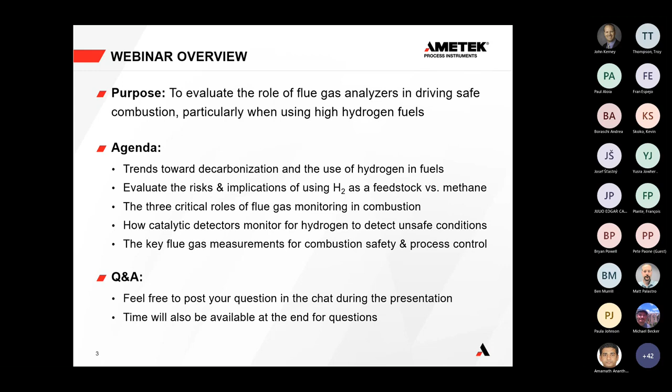So to start off, let's talk about decarbonization. So there's an inherent move towards decarbonizing combustion processes in industry in general. Governments have signed a lot of net zero carbon emission policies. There's a big focus on climate control and reducing greenhouse emissions, and that is particularly the case around carbon dioxide.

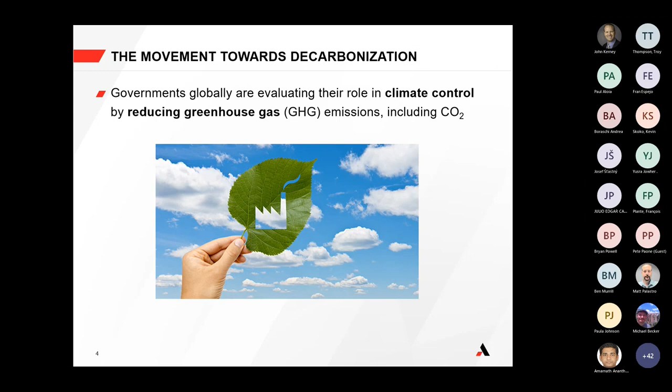And a lot of industries in the midst of it still require combustion. I mean, combustion generates carbon dioxide, but a lot of industries still depend on that. And that includes hard to decarbonize industries such as steel, cement, and chemicals, but also things like mobility in vehicles and ships and transportation. So there is still a heavy dependence on combustion and combustion-related processes.

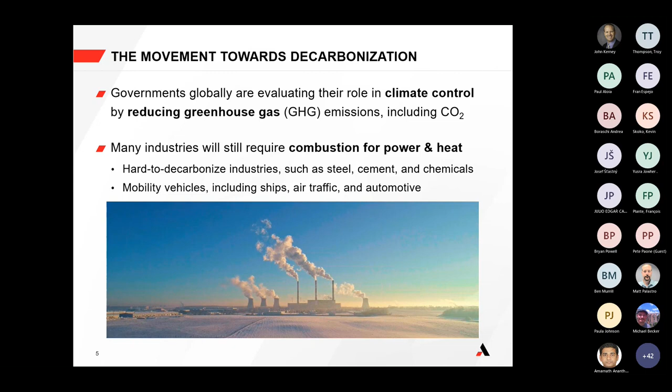When we think about large-scale decarbonization around combustion specifically, there's three methods that come up pretty commonly. There's the carbon capture method. There's different carbon capture methods, but carbon capture to remove carbon emissions from the combustion process itself. There's also electrification to generate heat in place of combustion, so using electricity so that you don't have to rely

on the combustion process. And there's also the use of hydrogen, which does not have any carbon atoms. So using hydrogen as a fuel to generate heat without carbon emissions. So that's another option as well. And so when you look at it, combustion remains important for our future, but it's also moving towards decarbonization. So we have to think about how are we going to decarbonize our processes.

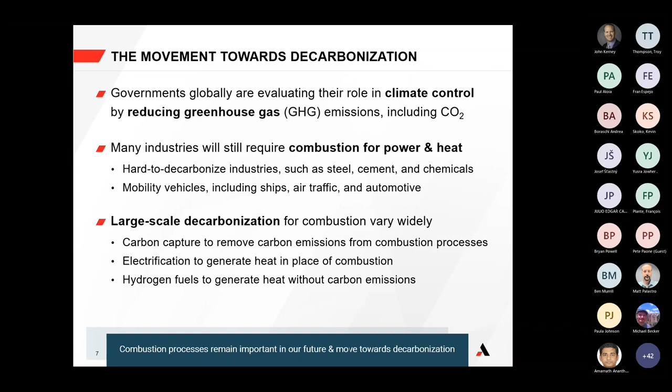So let's talk about those three methods: carbon capture, electrification, and hydrogen. So when we think about carbon capture, whether that be pre-combustion, post-combustion, or oxy-fuel carbon capture, however you choose to remove carbon dioxide from the combustion process, it's pretty well suited for certain applications. Carbon capture is much more economical, especially on the grand scale when you have a singular process or a singular pipe flow that holds a large amount of the carbon dioxide.

So things like blue hydrogen production, autothermal reforming, partial oxidation, or steam methane reforming, different processes that generate syngas, can use carbon capture very well because much of the process stream is consolidated, and that centralized singular source can be sent to the downstream carbon capture system for treatment and removal of the CO2.

So it's pretty well suited for large scale systems and centralized emission sources, but it becomes more of a challenge, especially when you look at flue gas carbon capture, where some plants have many different combustion point sources, where it would take a lot to revert all those stacks to a common duct and then use low pressure carbon capture methods to remove the CO2. All of that tends to be much more costly for flue gas, and it can require a significant amount of equipment. So that's just the view on carbon capture.

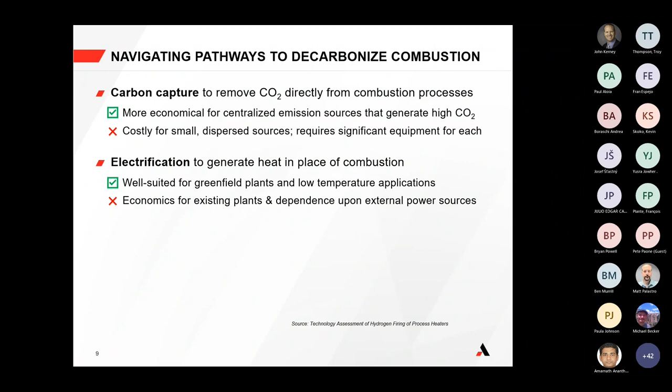And there's also a dependence on external power sources. You're still going to need some type of electricity to generate the heat, and so that can be much more of a challenge for high temperature applications. So electrification has its place in the realm of decarbonization, but it can be more of a challenge for existing plants around combustion. And then hydrogen fuels tend to be much more versatile.

It's sort of agnostic whether it's a centralized combustion source or small dispersed combustion sources and furnaces. So much more flexibility there because you're just changing the fuel from natural gas or oil to hydrogen or a hydrogen blend. So it's much more versatile from that respect, and it has much less of an impact at the combustion source. There may be considerations; it would be prudent to get an evaluation to see how your burner can handle hydrogen fuels, but outside of changing maybe the burner and some piping, it has much less of an impact at the combustion source itself.

You're not installing large carbon capture systems, for example absorber towers, or changing the entire vessel to be electrified. So it has much less of an impact on the combustion source itself. And it also has less plot space requirements. Like I said, there's no major absorber tower to accommodate within your plant.

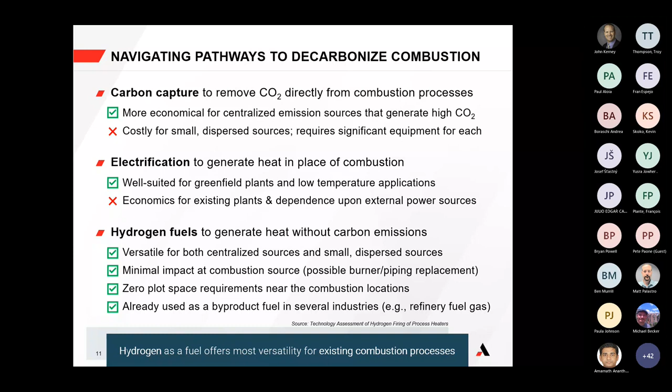And the other thing to realize is that hydrogen fuels are not new. They're actually used as a byproduct fuel in many industries. One case that comes up pretty often is refinery fuel gas. Some refinery fuel gases can contain up to 70% hydrogen. So it's not a new thing, and for some industries it's pretty common already. So hydrogen as a fuel source certainly offers the most versatility for existing combustion processes.

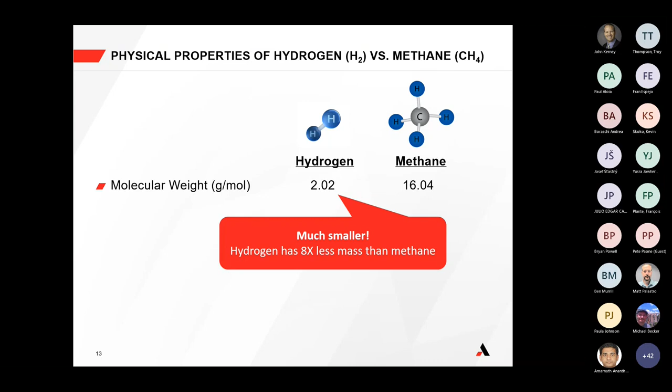Now let's take a look at combustion, and specifically how the hydrogen molecule compares to the methane molecule. We can first talk about the physical properties and then go into the combustion properties. On the physical property side, one of the most notable things is that hydrogen is much smaller. It's 8 times less mass compared to methane. And as a result, it's also much lighter; it's 8 times less dense compared to methane.

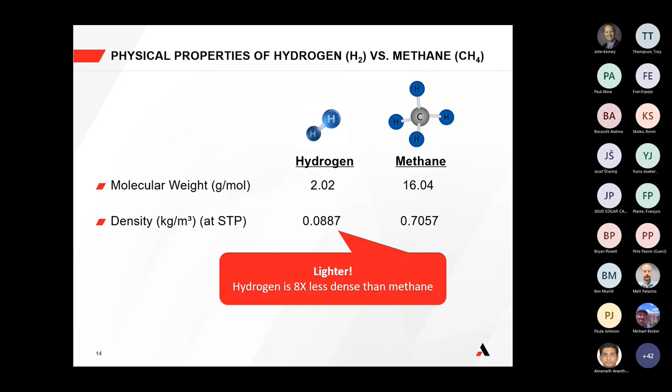So already you have this very small and very light particle in your fuel source. So that's some differences already. And also, because hydrogen is a small molecule, at the same temperature it actually moves 3 times faster compared to methane.

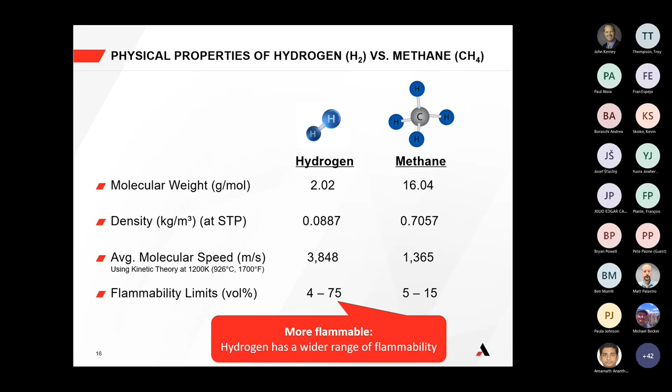So it's even more a fast-moving molecule compared to methane at the same temperature. And beyond that, it has a much wider range of flammability. I mean, the flammability of hydrogen is considerably higher compared to methane, from 4 to 75%, compared to methane's window from 5 to 15% by volume.

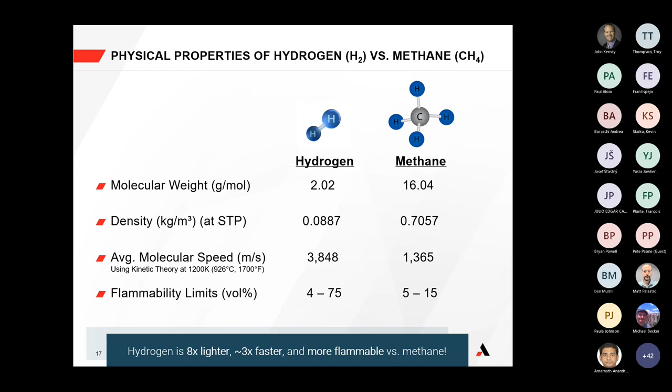So ultimately, when we look at hydrogen, it's 8 times lighter, almost 3 times faster diffusing compared to methane, and it's much more flammable. So when we think about designing our combustion system and adding high hydrogen fuels and high hydrogen fuel blends, there's something to consider here for the differences. So that's just the physical properties. Now let's talk about combustion properties.

Now, hydrogen's unique because it's such a small molecule, but it also contains a lot of potential energy. So when we look at it from a volumetric basis, because it's so small, you're going to need 3 times more volume of hydrogen in order to meet the same heat release that you have with methane. So if you currently have your fuel flow having a volumetric flow monitoring system, you would anticipate needing 3 times more hydrogen in order to get the same amount of heat release as what you might be using with methane right now.

So if you measure flow on a volumetric basis, you're going to need 3 times more flow in order to match the heat release of methane. But on the flip side, if you monitor mass flow of your fuel, you'll need about a third of what you currently have as a mass flow for methane for the same heat release. So it's pretty important to be mindful about whether or not you're going to be measuring flow on a mass basis or on a volumetric flow basis, because that has different implications for what you anticipate when using hydrogen as a pure fuel source.

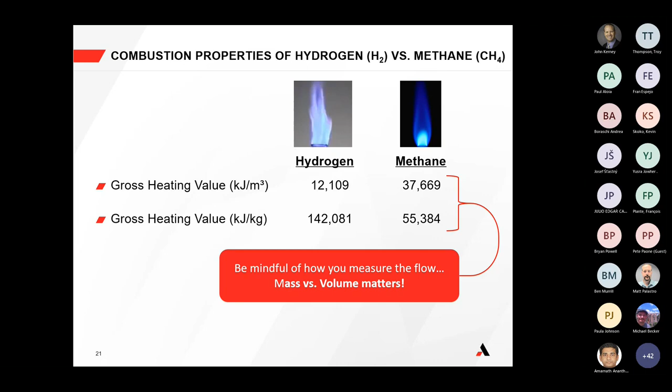Now, beyond that, hydrogen also has a much faster flame speed. It's 10 times faster compared to methane. And so if you use a premix burner, for example, you could have a potential issue of flashback because those hydrogen flames will consume the oxygen as fast as possible. It is much more prone to flashback because of that faster flame speed. And then beyond that, hydrogen flames burn slightly hotter compared to methane. So something to be mindful of, especially if you have certain metal around your burners.

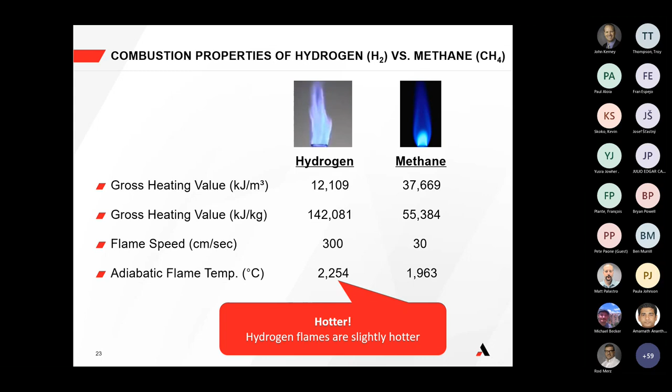And then on an ignition temperature basis, hydrogen is similar to methane, but still it requires less temperature to react compared to methane. And then finally, less energy is needed to ignite hydrogen compared to methane. And it's not just a little bit less energy, it's 10 times less energy to ignite hydrogen over methane. So something to be aware of is obviously it's much more prone to sparking and much more prone to ignition because of its much lower ignition threshold, because it's a much smaller molecule as well.

So ultimately, the takeaways on the combustion properties of hydrogen are that it's 10 times faster on a flame speed basis, it burns hotter, and also it's important to consider those differences in heating values, whether it's on a mass basis or on a volume basis.

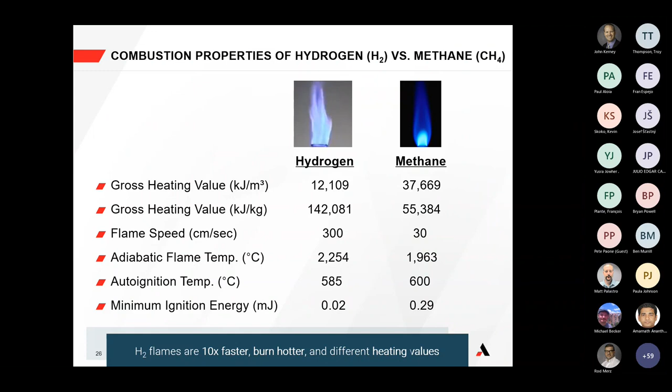So pulling that together, some other implications of using hydrogen versus methane is that there's less air requirements. If you were to design the combustion reaction around the same heat release, you would actually need 20% less air compared to methane. And so if you have a high hydrogen fuel blend and then go to pure hydrogen, you have to be mindful that you have the right amount of air, because hydrogen by itself would need less air compared to a methane fuel or a mixed fuel.

So it's important to give some margin, especially if you're going to have potential swings in the composition of your fuel gas. So something to be mindful of there is that hydrogen by itself needs less air, but if you have a mixture of hydrogen and methane or hydrogen and some other compounds, you're going to have more air as a buffer in order to handle that high hydrogen fuel.

And then on a potential NOx emission basis, because hydrogen moves faster and burns hotter, those potential hotspots create more potential NOx. So that is something to be mindful of, to monitor NOx levels or NOx requirements, because how the air is staged at your burner could dictate how much more NOx you should see. So there is a potential risk of having higher NOx emissions.

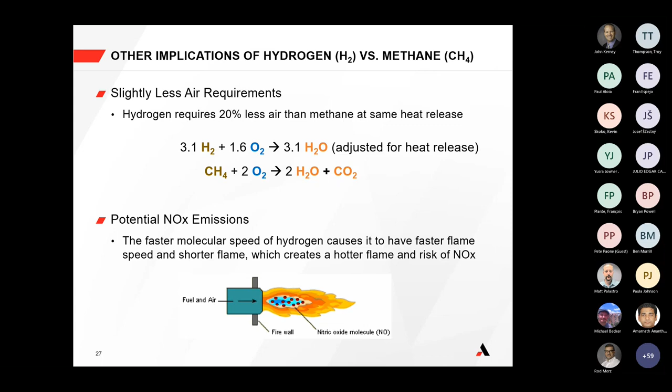So if we kind of list those potential risks of hydrogen, distilling out what we talked about from the property side, hydrogen firing or high hydrogen fuel firing shows a potential risk of flashback, especially in premix burners. So that's something to be aware of. It does show the potential risk of higher thermal NOx production because of those hotter flame temperatures and because of that faster flame speed, smaller flame size, more potential pockets for higher temperatures, which generate higher NOx.

And that could also impact permits too, especially if your permits are on a ppm level basis, because you're changing that. It could also impact you on a permit basis because you're generating water and you're converting your permits to a dry basis. So that's something else to be mindful of as well.

Other risks: because of the high temperature, certain firebox geometries may have higher radiant heat directed towards the tubes. So with higher temperatures at the tubes, it might be something to monitor the tube temperature. And then also a potential risk of overheating near the burner and other metal pieces. So it is important to think about what metal parts are exposed, whether that be like a flame rod or other types of metal pieces around the burner, and considering either increasing the thickness of that metal or having a different type of metal to dissipate the heat and be able to handle that exposure to hydrogen and hydrogen combustion.

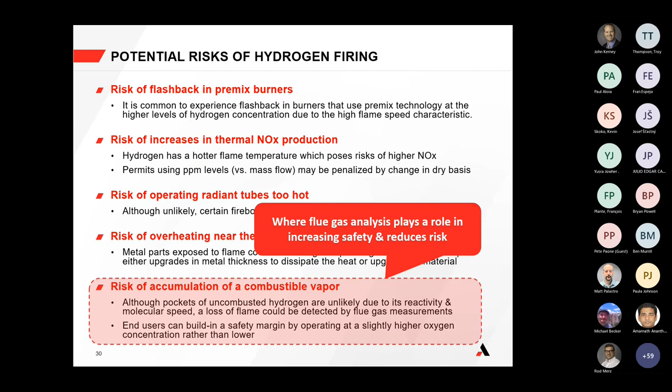So when we talk about flue gas monitoring, the next half of this presentation, flue gas monitoring focuses primarily on this last risk around hydrogen firing. And this is really where flue gas analysis plays a pretty important role in increasing safety and also reducing risk. So now let's talk about the three critical roles of flue gas monitoring. The first role is the role of the operational set point, and I'll get into that in a second. The second role is the role of optimization, so fuel efficiency, and the third role is safety.

So when we talk about the operational set point, the flue gas analyzers such as a zirconium oxide detector measure oxygen on an excess oxygen basis. And that excess oxygen reading represents the oxygen after all combustible content is consumed. So if there was any chance that there was a combustible cloud or methane, the excess oxygen reading would first consume all of that combustible content on the sensor itself, and then the remaining residual oxygen would be measured afterwards.

So the excess oxygen measurement is important because it correlates directly to the air to fuel ratio at the burner. So if you have a low excess oxygen level, you can increase the air to the burner, and that would increase your operational excess oxygen set point. And as I said, it ensures that you have sufficient air provided at the burner with a safety margin so that you're not running at a ragged edge of stoichiometric conditions and potentially unsafe conditions. So let's talk about the importance of the excess oxygen measurement.

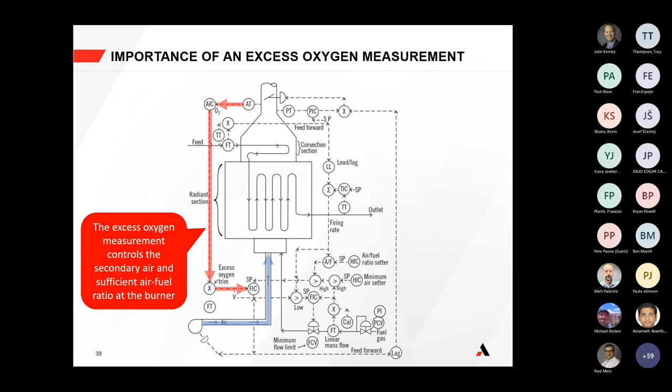So that's the first important thing. And then it's important to realize, what's the optimal excess oxygen level? Because your set point depends greatly on the fuel that you're using. And you could have many different fluctuations based off of the mixing characteristics within the burner, based off of variable load and content of the fuel itself, especially if you switch between two fuels at a given time. It could also be impacted by humidity and density. So there's really no fixed value. So how do you know what's optimal?

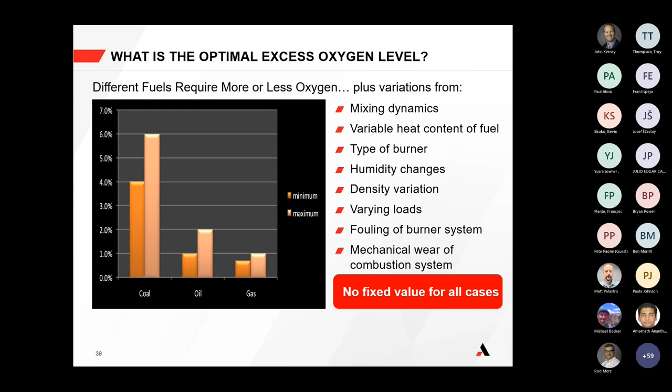And that's where the second role of flue gas monitoring comes in, and that's the role of optimization. Optimization means that you monitor the health of the combustion process through what we call a combustibles measurement. And combustibles is effectively carbon monoxide and hydrogen. So if you had a high hydrogen fuel, that would have some type of hydrocarbon content and some amount of hydrogen. The combustibles measurement would monitor for the unburnt carbon monoxide, and any incomplete combustion due to hydrogen would also be detected.

And so just to put that into a reaction type state, if you were to use a high hydrogen fuel that has methane, for example, that methane molecule would first be consumed into ppm levels of carbon monoxide and hydrogen, and then only if there's enough oxygen present would that carbon monoxide and hydrogen convert further to produce CO2 and water. And again, that's in the case of a high hydrogen fuel. If you had just pure hydrogen, then you may have ppm levels of hydrogen that you could monitor. And if you had spikes in hydrogen, you could effectively detect a flame out.

So let's talk about that role of optimization before we get into the safety element. When we talk about operating an excess oxygen measurement, as you increase your excess oxygen set point over time, you are running less and less efficiently, because at stoichiometric conditions, you could say that's 0% excess oxygen. That would be the ideal scenario. But you need a little bit of a safety margin. As you go too far, beyond 1%, beyond 2%, beyond 3%, you have increasing losses of efficiency because you're effectively burning more fuel in order to heat more air at the outlet. So there's an efficiency loss by operating too high of an excess air level.

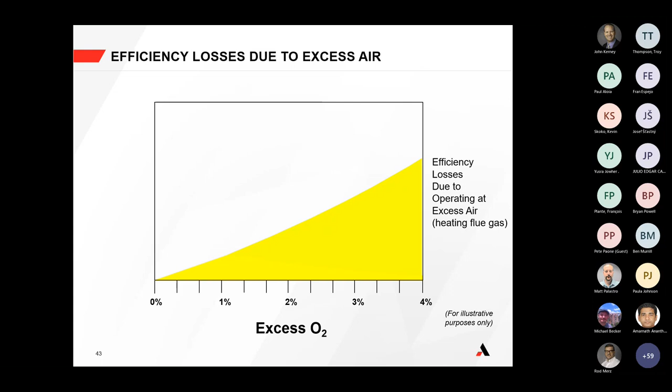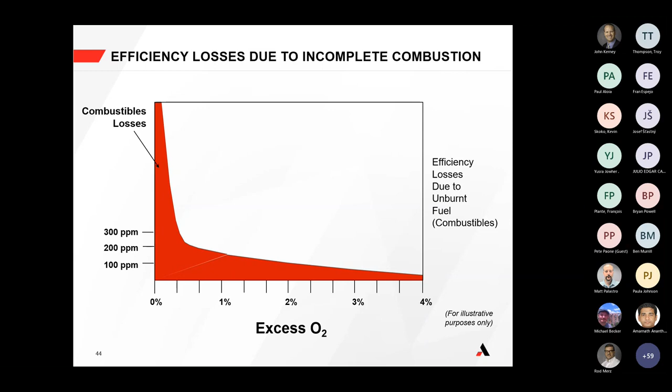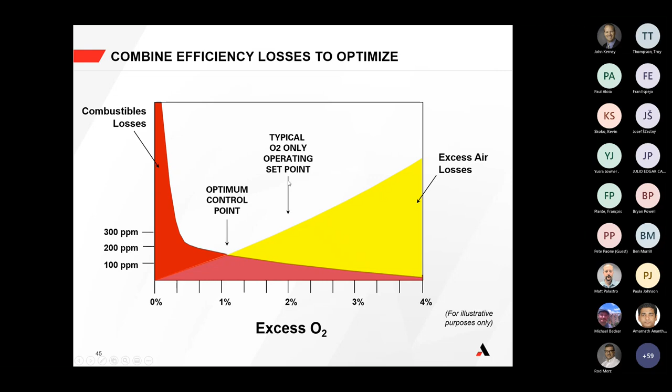But on the flip side, when you monitor combustibles, you have a potential risk of what they call combustibles breakthrough. So at some point, getting close to stoichiometric conditions of 0% excess oxygen, you have this risk of a significant spike in combustibles. And so by overlaying these two graphs in a hypothetical but very real way, you can go from what was once an operational set point to an optimal point.

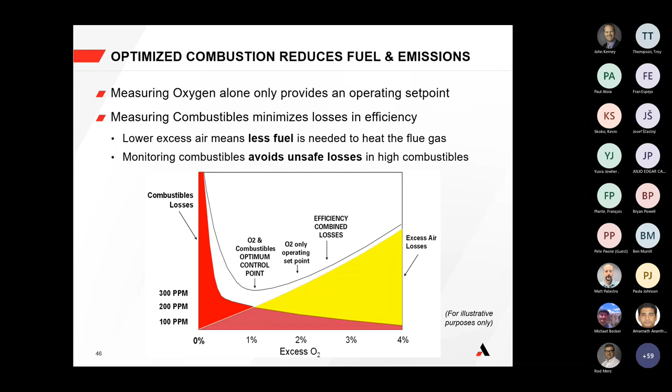As I mentioned, measuring oxygen by itself provides that operational set point. And that's the most important first step of any oxygen flue gas monitor, that operational set point for the burner. But from there, the combustibles measurement minimizes that loss of efficiency so that you lower your excess air levels, which means less fuel consumption, and you also monitor for any potential unsafe condition beyond this breakthrough point. So from an optimization standpoint, there is a very real secondary reference point that combustibles plays in order to have what we call optimized combustion.

And the third most critical role of flue gas analysis is the role of safety. Safety can come in the form of ppm level measurements for combustibles to make sure that you detect the onset of incomplete combustion and monitor for combustibles breakthrough. But then also the role of detecting percent level measurements of hydrogen and hydrocarbons from things like a fuel leak or a loss of flame.

And so when we talk first about incomplete combustion, as I showed you in this graph before, a combustibles detector can alert you to carbon monoxide breakthrough. So if you're using a high hydrogen fuel, you can detect that carbon monoxide breakthrough, and that combustibles breakthrough can be detected using that combustibles measurement.

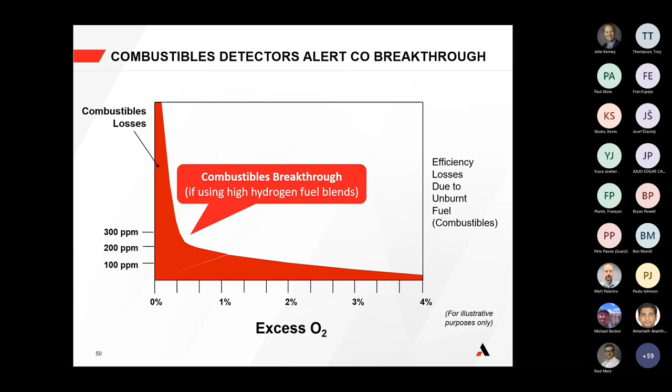And then when we look at the hydrocarbon detector, we look for things like flame out. Fuel leaks could happen because of a degraded burner tip, causing too much fuel to enter the system, or potential flame out because the burner air nozzle was plugging, so there's too little air. But in either case, a hydrocarbon detector can be used to detect those percent level measurements of methane and hydrocarbons, and in this case, even hydrogen.

So hydrocarbon detectors provide that extra level of visibility for high percent levels. And this is also the case for startup, especially while you get permissives for light off, but also for operation. We have had customers who have detected high levels of hydrogen in their process, and they were able to detect it early because they had a methane or hydrocarbons detector to monitor for that.

Now let's talk about the specific catalytic nature of these methane and hydrocarbon detectors. So catalytic detectors are used for both methane monitoring and also for combustibles monitoring and for hydrocarbon monitoring. And all of them can be used for hydrogen because hydrogen is very reactive within the similar zone of both of them. So there are two different types of catalytic detectors that we use and that we see in industry.

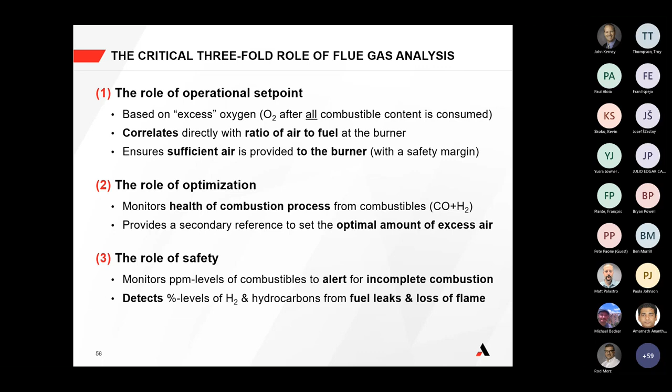So when it comes down to the flue gas measurements for pure hydrogen, you can use the excess oxygen measurement for safe operation. As I said, that's a primary indicator to make sure that you have a sufficient safety margin, that you have enough air to fully consume any amount of fuel in the flue gas, but also to make sure that you have a good operating range for your process. So the excess oxygen measurement is important for safe operation.

A combustible detector can be used to monitor for ppm levels of hydrogen, and that can be important for safety, especially if you are running very low excess oxygen levels. And it also provides a secondary reference point just to make sure that you're not operating too low, where you have high ppm levels of hydrogen, for example.

And then it's also important to have a percent level hydrogen measurement for safety in the case of loss of flame or fuel leak or light off. And even in some cases, different processes use methane to light off on. So by having a hydrocarbon detector to monitor for percent level of hydrogen, you can also monitor for percent levels of hydrocarbons and provide an extra safeguard for safety during light off and purge cycle. So those are the three important measurements for flue gas monitoring for pure hydrogen for safe combustion.

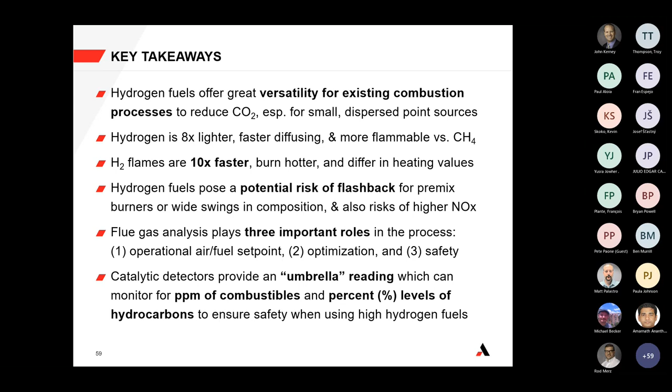There are a couple of questions in the chat. The first one came in when you were on slide 55 talking about the catalytic detectors. This is a longer question. I'll read it, Tim, and then we can talk through it. It says when using methane, we measure the CO, realizing that CO sensors measure both CO and hydrogen. How to relate the value from the sensor when a combined hydrogen and methane gas is used, especially when the hydrogen uses less air? For example, with methane, let's say the CO level may be 400 ppm. What value would we be looking at with 20% hydrogen added to the methane?

That's a great question, John. I'll take that in pieces, and if I didn't cover anything, please fill me in on the next half of the question. The first thing I want to point out is that the combustible detector is designed for that range of carbon monoxide and hydrogen. Combustible detectors are not operated hot enough in order to crack methane, which is why you need a hydrocarbon or a methane detector in order to crack methane effectively.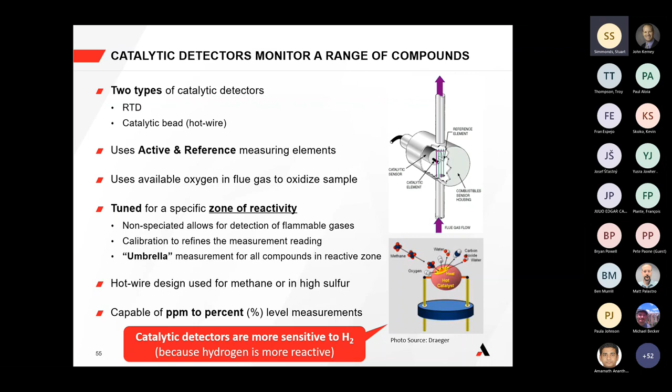Yeah, that's a great question. So I'll go back to this slide right here just to focus our attention and anchor our conversation. But from a pure hydrogen standpoint, the combustible measurement provides that ppm level measurement in case there were any hydrogen. So it's more of a low level safety measurement when it comes to combustibles, especially when you're using pure hydrogen.

But my biggest concern is when there's variability in the composition. That's where I become very concerned, because if you go from pure hydrogen to any high hydrogen blend, you immediately have the risk again of combustibles breakthrough, of potential ppm levels of carbon monoxide to indicate unsafe conditions.

So when it comes to pure hydrogen, you've got that ppm level visibility for hydrogen safety, and then you've got the hydrogen detector for percent level measurements of hydrogen. When it comes to high hydrogen fuels, I still see the need for some type of combustible measurement, because you're going to want that visibility on whether or not you're close to combustible breakthrough.

Yeah, agree, Tim, 100%. So all the time that there is some hydrocarbon in there, we can apply the same logic to not just the safety and the set point, but the efficiency point, your middle point, right? But if we trend towards 100% hydrogen, should we ever get there, your ppm breakthrough is safety, which I understand, that's great, but can we consider any way of doing an efficiency level, or do we need to look at it some other fashion?

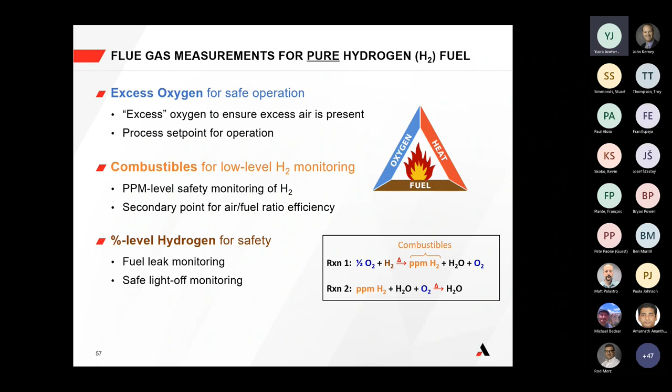I have one question. Let's say we have boilers and furnaces running on fuel gas, mixed fuel gas from natural gas, also off gas from the plant. So how is it possible? Is it straightforward? If I could convince the management and we decide to go with replacing the fuel gas with hydrogen, is it as simple as changing the supply of the fuel gas? I mean, the type of fuel to be burned, from fuel gas, which is methane rich, to hydrogen. Is it as simple as that, or does it require changes in all the setup and firing philosophy?

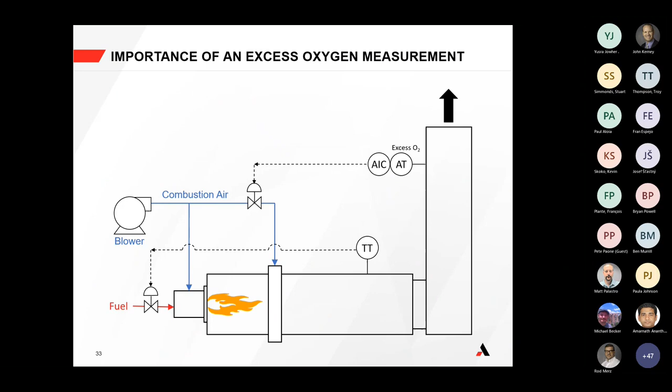There's also things like making sure that you have the right piping material, so stainless steel piping material, because carbon steel can face degradation over time. So you want to make sure that the piping material that you're using for your fuel, or if you have a separate line, is intact so that it can handle that type of change in fuel. Because hydrogen is unique and it does have certain characteristics when you think about the piping as well. So I think it'd be prudent to have a review of your process to make sure that it can use hydrogen.